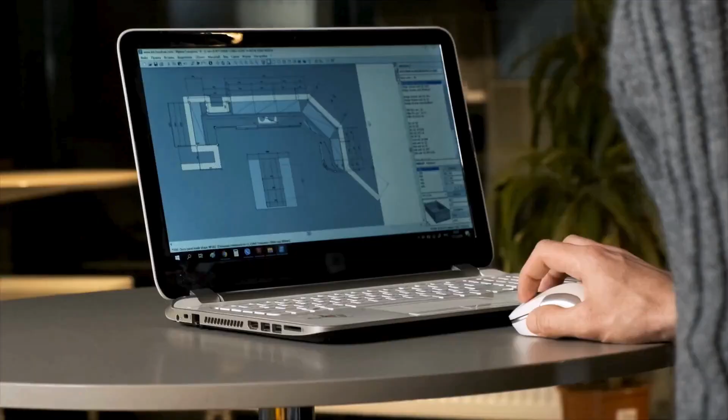Wow, what a weekend. Great weekend, feeling better. I was sick last week. My wife was sick last week. But, doing the stuff you should be doing, eating healthy, doing a little bit of exercising and whatnot, and try to get things going. So it was a great weekend. Glad to be back this week.

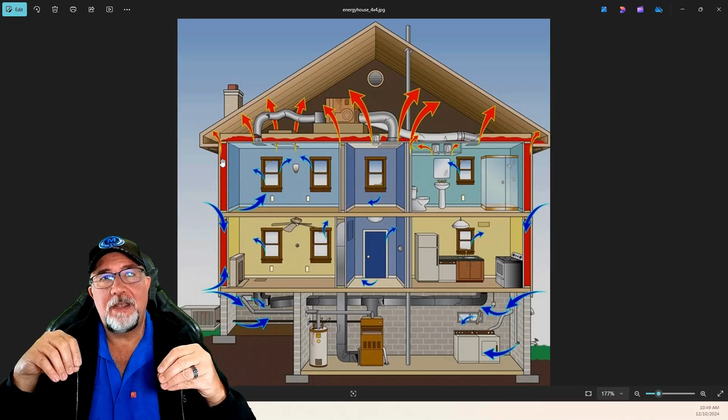Now, they used to do this manually, but software today is obviously much more accurate and a lot quicker. So the software determines that. But then it says, hey, I got all this coming in. I need to get rid of it. So what do we got to do? Now we need to size an air conditioning system to be able to remove it. In a plain sense, the purpose of the air conditioning system is to remove unwanted heat from the inside of the home and bring it outside.

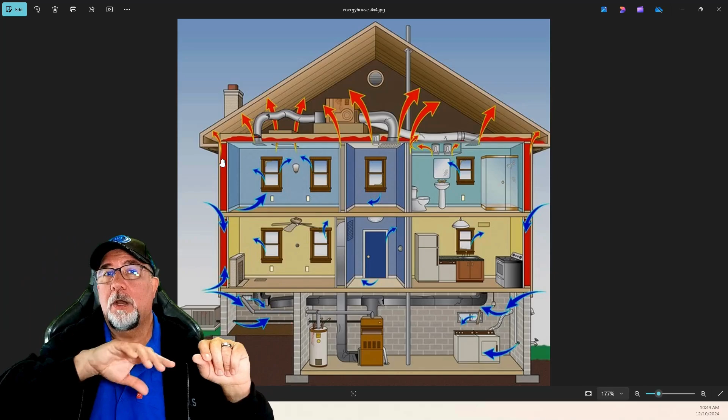Now, we're going to have other classes that talk about how it does that. I'm not going to focus on that here because the purpose of this video is to understand why we need load calcs. Now, with doing load calculations, the current standard is called Manual J8. I don't want to get technical, but if you Google Manual J8, there's a book about this thick that goes through all the calculations, all the understandings. There's a lot to it.

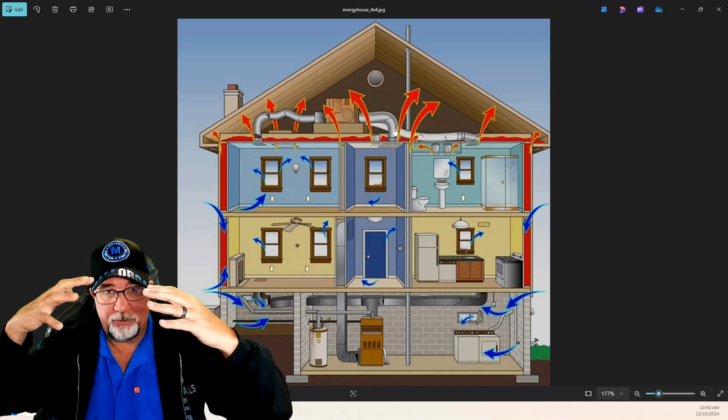But besides the walls and the ceiling and all this stuff, when the air goes through the ductwork we talked about last week, it does gain heat. So there's another factor we have to determine. The software does that. It determines, based on the attic temperature, the outside temperature, and the temperature of the air going through the duct, how that's going to affect the temperature.

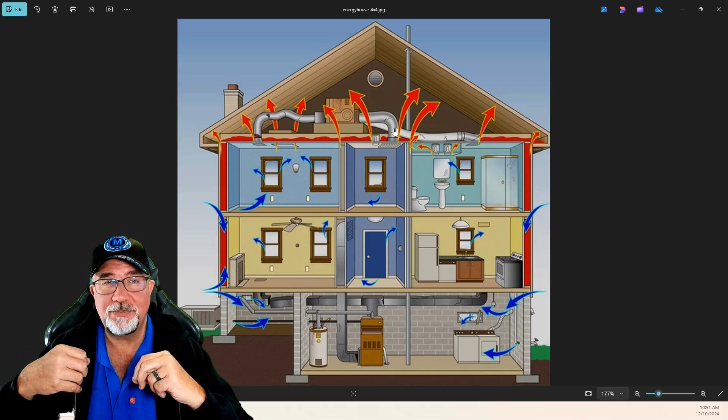Other things in the house: everything that has a motor or some type of internal mechanism, including yourself. Animals have internal mechanisms. Toasters, ovens, stoves, refrigerators, appliances, no matter how small or large, they all put off some type of heat. It could be minimal, it could be massive. So the other purpose of a load calculation is to determine how much heat it's putting out. Now, the average person, depending on their activity, weight, age, and all kinds of things, can put out anywhere from 300, and the term that you use is BTU.

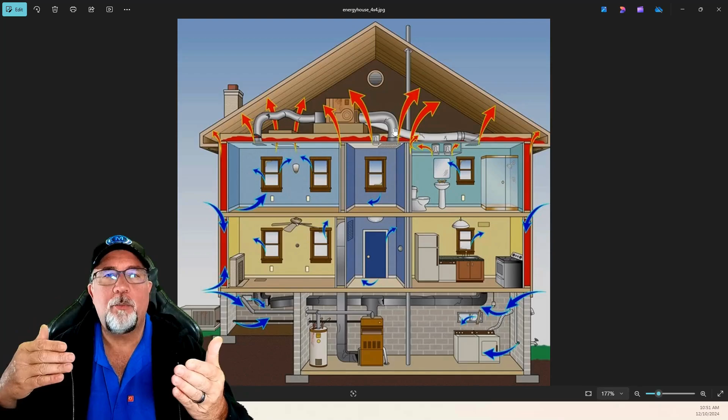I don't want to get, again, I try not to get technical. It's a British thermal unit, but that's how we calculate the heat. An average person could be anywhere from 300 to maybe 700 BTUs just resting, depending on the individual. Now, as we walk, as we exercise around the house, we can put off more heat. Well, if I'm putting off heat, what happens to that heat? That has to be calculated into the load calculation to say, how do I get rid of it?

Have you ever been in an area where when there's only 2 or 3 people, it feels very comfortable in there, but when you pack it in with 20, 30, 40 people, it's hot as bejesus in there? That's why. Because if you go from only 3 or 4 people with 1,200 BTUs of heat coming out, and it's cooling fine, and then you pack it in with 30, 40 people, do the calculations. That's a lot more heat. And that also has to come into consideration.

But it's such an infrequent event that it happens. Now, if you're looking at commercial and it's something they're loading up with people all the time, that's a different story. But in a house, you want to think about what the norm is going to be. All right. So the people, the appliances, the windows, the walls, even the floor, depending on the type of floor you have, could make a difference. Is the house on a slab? Or is the house on a basement that's below ground? Is the house on a crawl space?

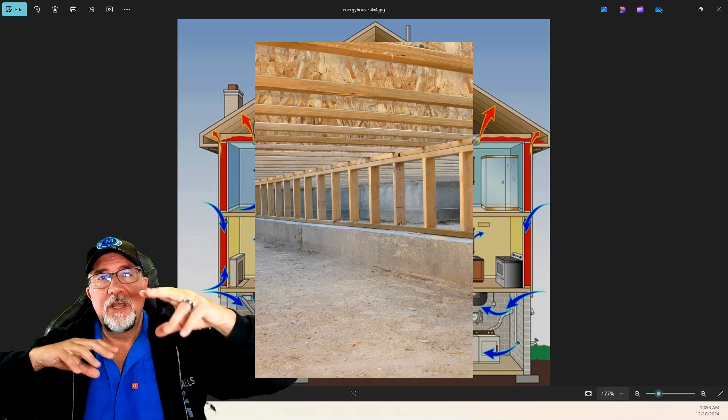Everything that you can conceive of being open to the outside or creating some type of heat. Animals, cats, dogs. I don't know about fish. I'm sure in some way the fish are inside the water, but the water is the one that controls. So we'll put fish off to the side.

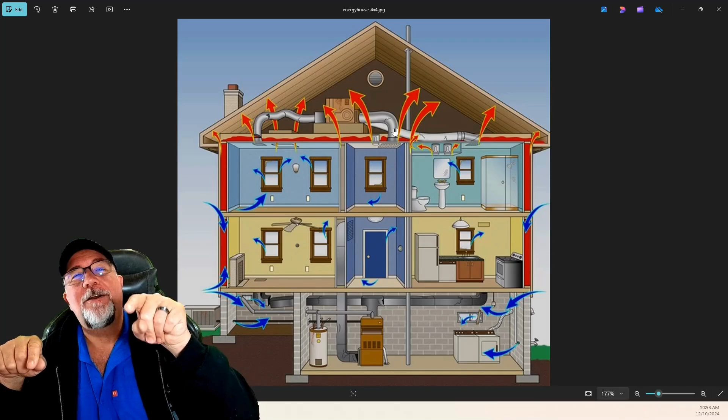I don't know. That could be an iffy thing, but cats, dogs, birds, all these things that are in the homes, they are going to generate some type of heat, and we have to find a way to remove that. Okay, and that's what the air conditioning system does. Again, for another time. So load calculations are what we use to determine.

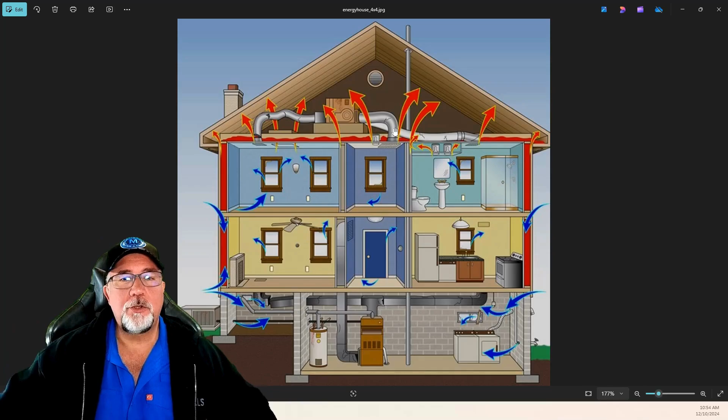Now I'm going to show you the software that we use. Here we go. So this is called Wrightsoft. Now what we do when we're designing is we'll actually take the drawing from the architect and put it in the software. We retrace the house so we have the format of the house, and then we do all of our work inside to make sure the house is laid out exactly as the architect or builder or homeowner, we do a lot of work for homeowners, provides us.

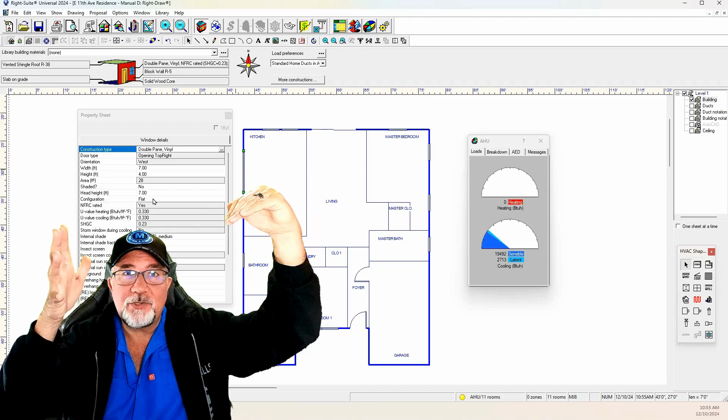Things like the windows, so they'll show us the window, and when we put the window in, we're going to want to determine, okay, the width of that window is 7 feet, the height of the window is 4 feet. We also need to understand how far it is above the ground, because that helps us to understand the sun. Where's the sun going to hit that? Because when we have that solar reflection, we've got to determine at what angle, and that's what the software does, which is great. It determines at what angle that sun is hitting and helps to determine how much additional heat load is going to be added to that.

Now, another big thing that a lot of people don't take into consideration. We talk about the amount of trees and bushes and things around the house. And if it's something substantial, we'll typically put it in. But here's the concern. If we focus too much on shrubbery, and it has like this big giant tree, and we've calculated that tree as providing tons of shade to that house, the problem is, if you ever take that tree down, that negates all of that shading, and you could have additional heat penetrating from the sun that could cause some hot spots. So take that into consideration.

If you do any outside major renovations, you may want to have a load calculation done just to make sure that it did not affect how much cooling needs to be, because there'd be nothing worse than having your perfect comfort in your home, having to chop down this big tree, or a hurricane or tornadoes come through and rip that tree down, and now you have no tree and you got this big wide opening, and then you wonder why the house all of a sudden is not cooling properly. So we take that into consideration.

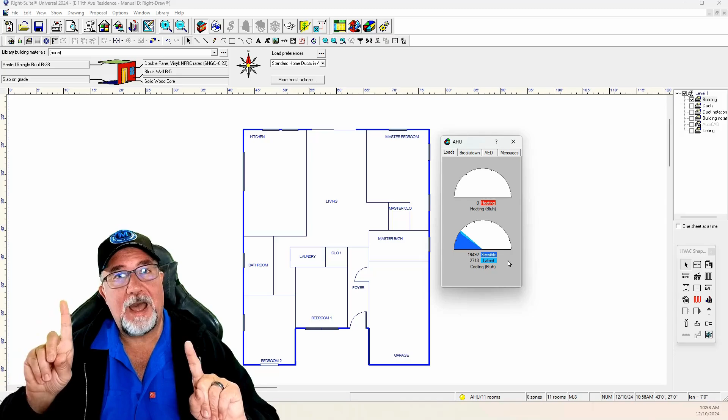All right. So when we have the house facing north and south and east west, watch what happens. Look at these numbers. I'm going to double click on the center of this, and it's going to automatically position the house on the software to the absolute worst direction the house could be in for the biggest load. So watch those numbers and do the calculation. You can probably pause it once you get the new numbers. So I'm double clicking and watch.

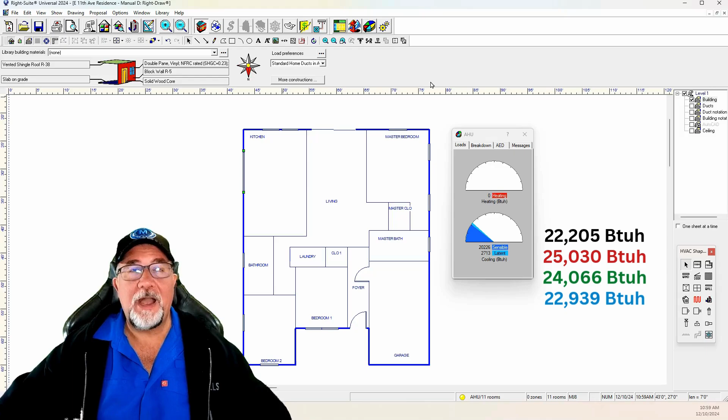See what that went up to? It's only a few thousand BTUs, but it's different just from the direction of the house. And it can make a huge difference. Well, let's look if I flipped it the other way. See, the latent doesn't change too much, but the sensible does, based on the direction. Now, the house isn't very big, and there's not a ton of windows. So imagine if the house was bigger, and there were a lot more windows, and they were taller, and there were tons of sliding doors, double French doors and stuff like that.

Those have the biggest. If we go to the breakdown here, you can see here's glazing. That's your windows in this house. So that is the biggest load in your home. And if that's the biggest load, remember from yesterday when we had those big old jalousie windows where they opened up and they were huge, and every time you closed them, they never had a perfect seal? Well, that's where you probably got the 300 to 400 or 400 to 500 square foot per ton.

But nowadays, these windows are double pane, triple pane, argon filled, air filled, low E. They got all these fancy things with them, and they make them so efficient. You may spend an extra $20,000 on getting better windows, but over a period of time, it's going to more than save money on your air conditioner, because you're going to be able to probably drop a ton to 2 tons, depending on how many windows. There's thousands and thousands of dollars of savings right there because you were able to reduce the tonnage when it was time to change the system, as well as the energy cost.

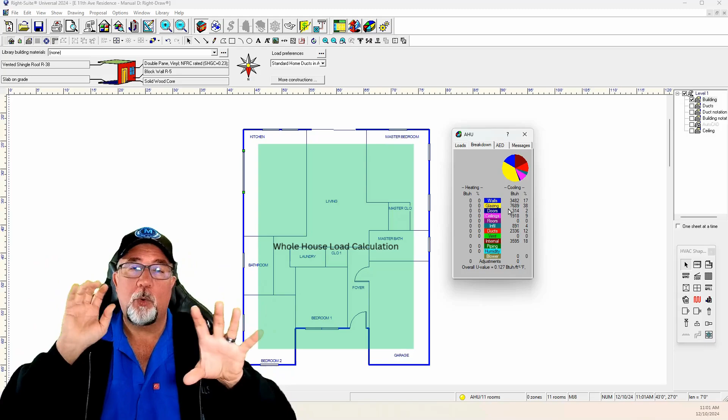So all of these things come into play, and that's why we need a load calculation. And when you're renovating your house, it makes a difference. If you're making any big renovations to the home, you're ripping out windows, you're adding on, you need a whole house or room by room load calculation. Now, the whole house load calculation typically is good if all you're looking to do is get a general load calc for the house. I'm not looking to look at individual rooms. I'm not looking to do duct work, because if it's not for duct work, I really don't need to worry about a room by room.

I just need the exterior. I need the windows, the floors, the ceilings, and stuff like that. But if I'm going to have duct work added and a duct system, we'll talk about that, Manual D. If we're going to have that added, then I need to make sure I have a room by room. Otherwise, we don't need room by room. You can just do a whole house.

So if you're doing any renovations, if you're building a new house, it's actually required. It's mandatory in most places to have a load calculation, and it's getting more and more mandatory in different cities, especially some of your outskirts, which is good, because I've been in this business a long time, and I

would say 80% of the HVAC contractors or architects or builders, if they are not required by code to provide a load calculation, they won't do it, because they got the HVAC guy out there, not everybody, going 400 or 500 square foot per ton. I've been doing these houses for years, and it's a 5 ton, it's a 4 ton. We deal with this all day long at ProCalcs.

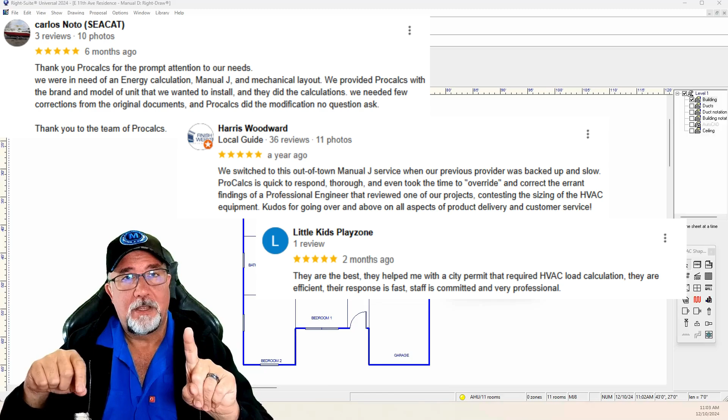All right, here's a big example, and we run into this and we get a lot of pushback, but after it's completed, we get praise. Apartments, condos, think about it. And this is kind of just a common sense thing. If I have this apartment or condo and let's say it's 5 stories, my first, second, third, fourth, fifth. My 5th floor has a ceiling and an attic that's open to the outside, right? My 4th, 3rd, 2nd, 1st, they don't have any ceilings because there's a conditioned room over top of them.

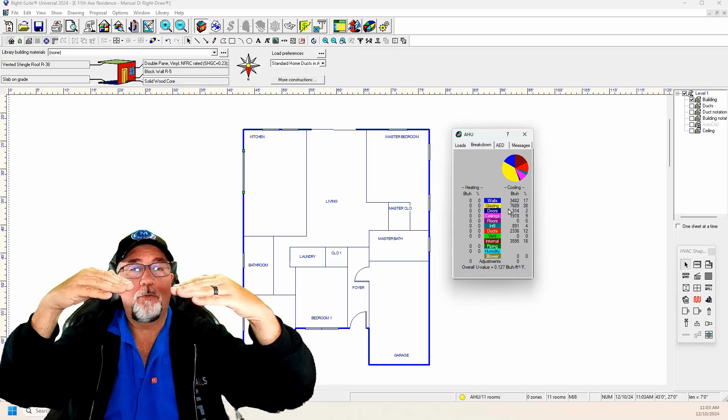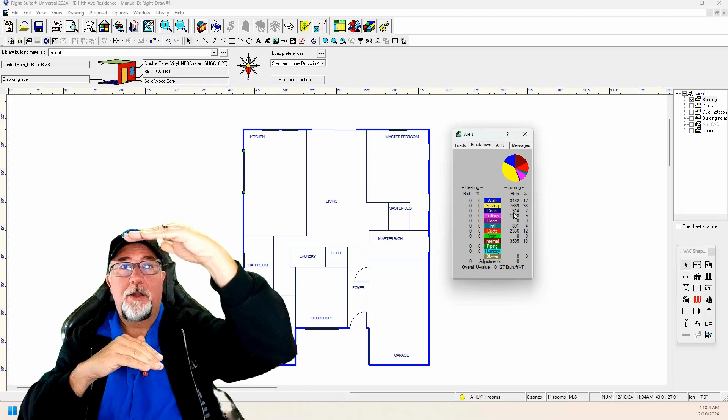Let's say I have condos on the outside versus the inside. The inside one has got no ceiling. It's got no load on the left and right side. If it's open to the front and the back, it's open there, but it's got no floor load. It's got no ceiling load. It's got no wall load, so it's got no windows. Now I have these ones on the outside that have a wall that's adjacent to the outside, just like we talked about. You are going to have heat that penetrates that, so it's going to require more air conditioning.

So the one thing we see is they go in and they'll size one unit, whether it's the bottom or the top, and every other unit in the condo or apartment will get the same system. Because in their mind, it's a 1,200 square foot apartment or condo. It's the exact same as all the other ones. It's got to be the exact same size. No. We get in so much trouble, and that's why you end up with the ones in the middle where they cool down too quickly, they don't remove humidity, or the ones at the top are always hot because they didn't size it right. So load calculations are your saving grace, and you need to use them properly.

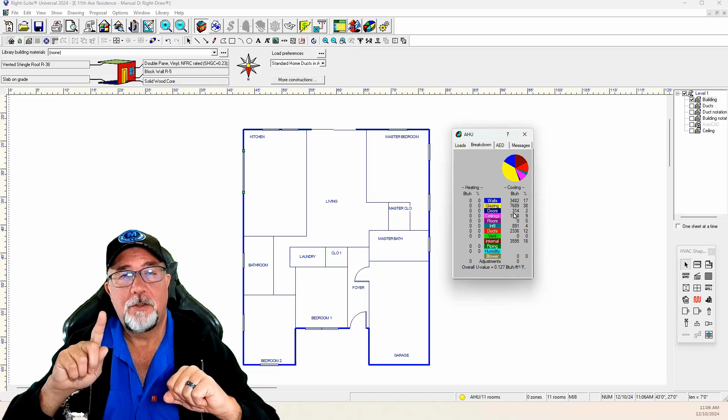And remember, you can teach the right person anything. You can't teach the wrong person anything. Are you the right person?